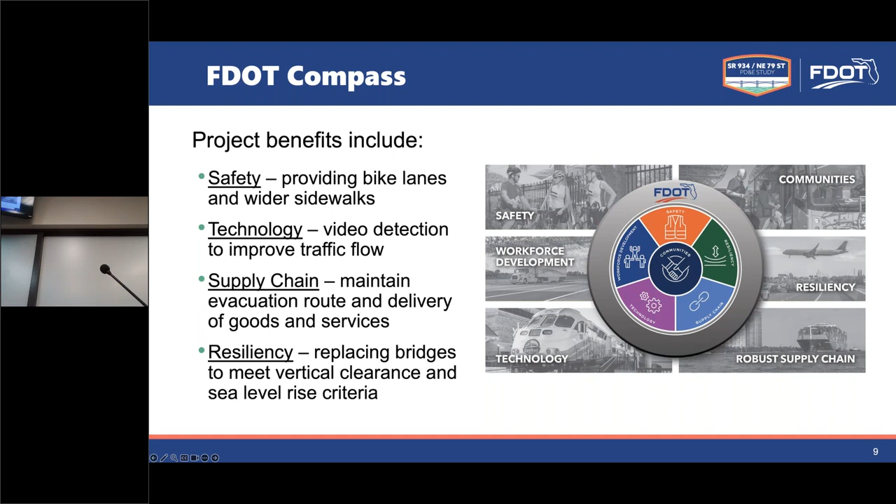The environmental review, consultation, and other actions required by applicable federal environmental laws for this project are being or have been carried out by FDOT pursuant to 23 U.S.C. 327 and a memorandum of understanding dated May 26, 2022, executed by the Federal Highway Administration and FDOT.

Project documents are available for viewing at the North Bay Village City Hall, 1666 John F. Kennedy Causeway, first floor, North Bay Village, Florida, 33141. Hours are 8 a.m. till 5 p.m. Monday through Friday. Project documents are also available at the FDOT District 6 office, 1000 Northwest 111th Avenue, Miami, Florida, 33172. Hours are from 8 a.m. till 5 p.m. Monday through Friday. In addition, the project documents can be viewed on the project webpage.

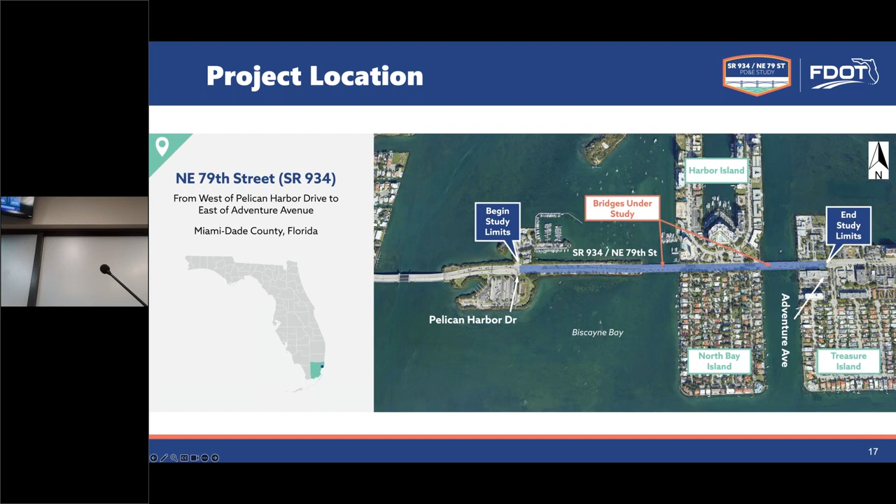FDOT is conducting a Project Development and Environment, or PD&E, study on 4 bridges, or 2 pairs of bridges, along State Road 934, Northeast 79th Street. The project study limits extend from west of Pelican Harbor Drive to east of Adventure Avenue, for a total distance of 0.87 miles. These bridges connect 3 islands within the city of Miami and North Bay Village in Miami-Dade County.

The existing bridges are concrete slab bridges, constructed in the early 1970s. The bridges are not deemed navigable by the United States Coast Guard. There have been several rehabilitation efforts performed on the bridges. The latest bridge rehabilitation in 2015 included the installation of a traffic railing on the outside lanes for bicycles and pedestrians on the Eastern Bridge.

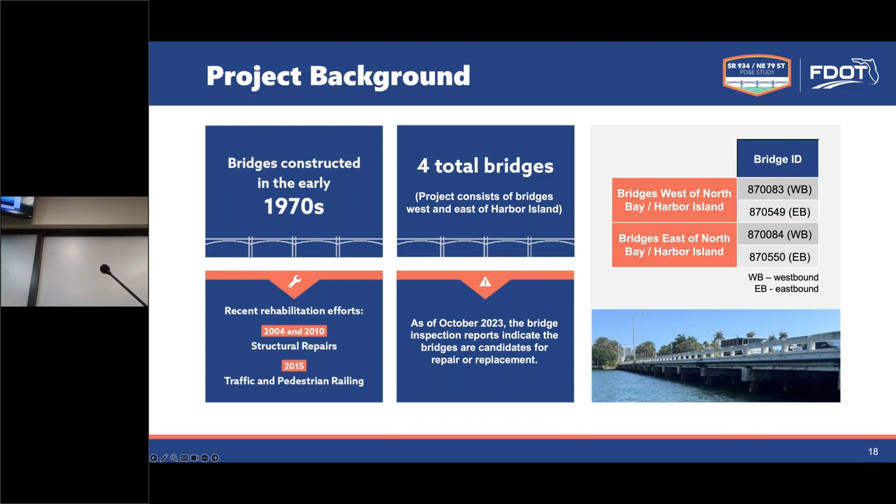Based on the most recent bridge inspections performed in October 2023, the bridges were found to be deficient and have a sufficiency rating below 50, which means the bridges may qualify for bridge replacement funds. The bridges west of Harbor Island include 2 separate structures that carry eastbound and westbound traffic.

The typical section consists of 6 lanes divided by a 15.5-foot wide raised median with 2 11-foot wide inside travel lanes and 1 13.5-foot wide outside travel lane that shares its use with bicycle traffic. Curb and gutter are adjacent to the outside travel lanes, along with a 5-foot wide sidewalk.

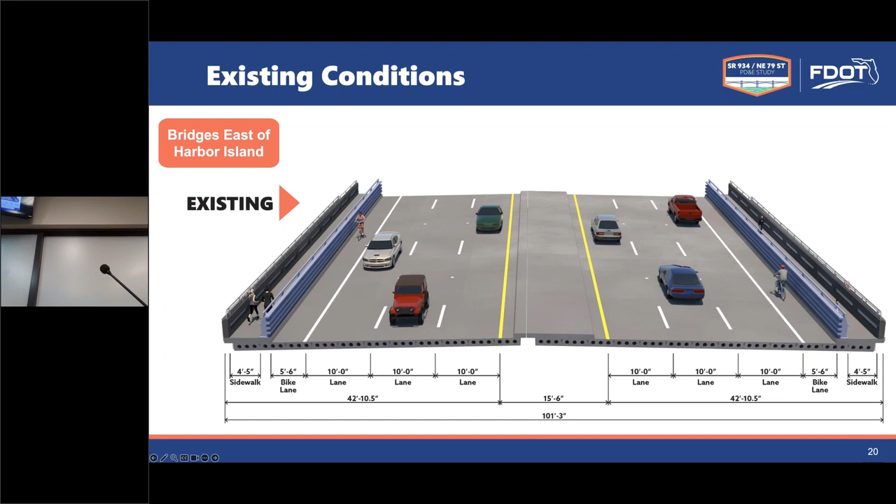The bridges east of Harbor Island are also two separate structures that carry eastbound and westbound traffic. The typical section consists of 6 lanes divided by a 15.5-foot wide raised median with 10-foot wide travel lanes, a designated 5.5-foot wide bike lane with curb and gutter, and a 4-foot, 5-inch wide sidewalk with a pedestrian railing.

The PD&E study is part of the transportation project delivery process. The PD&E process is followed by FDOT to identify engineering alternatives, evaluate environmental impacts, and comply with the National Environmental Policy Act, or NEPA, in addition to other federal and state environmental laws.

At the end of the PD&E study, and following approval from the FDOT Office of Environmental Management, a preferred alternative will continue into the design phase, followed by right-of-way acquisition and construction.

At this time, final design is funded for 2025. Right-of-way is currently not fully funded, and construction is funded for 2029.

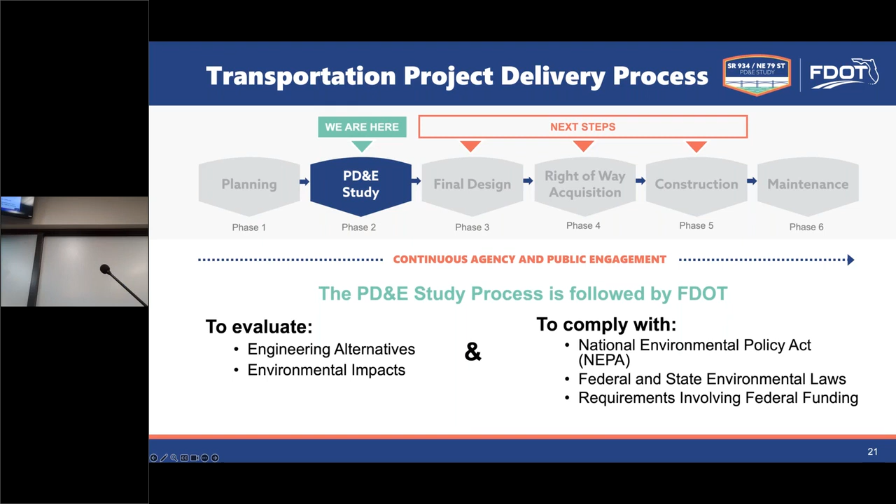The PD&E process utilized a continuous community outreach process to ensure that all interested parties have meaningful participation in the process. Public input and information received at the hearing will be taken into consideration when preparing the final documents for this study. The purpose of the PD&E study is to identify bridge replacement alternatives and to evaluate the potential impacts.

The project is needed to address the structural deficiencies of the 4 existing bridges, or 2 bridge pairs, and to maintain the emergency evacuation route and response times.

The existing bridges are more than 50 years old in a highly aggressive environment and are showing signs of deterioration. The department will continue to perform timely repairs to keep the bridges in good condition until they are eventually replaced.

Planning consistency means the project information is consistent with the FDOT and the Miami-Dade Transportation Planning Organization planning documents and programs. The project is identified in the approved Miami-Dade TPO Transportation Improvement Program. Efforts are ongoing to include all future project phases in the TPO Long Range Transportation Plan.

A tiered approach was used to identify and evaluate alternatives. Following initial data collection, the next step was to perform a typical section analysis, considering the number of lanes, lane widths, shoulder widths, and pedestrian and bicycle accommodations. Bridge height and constructability were also considered in the typical section analysis.

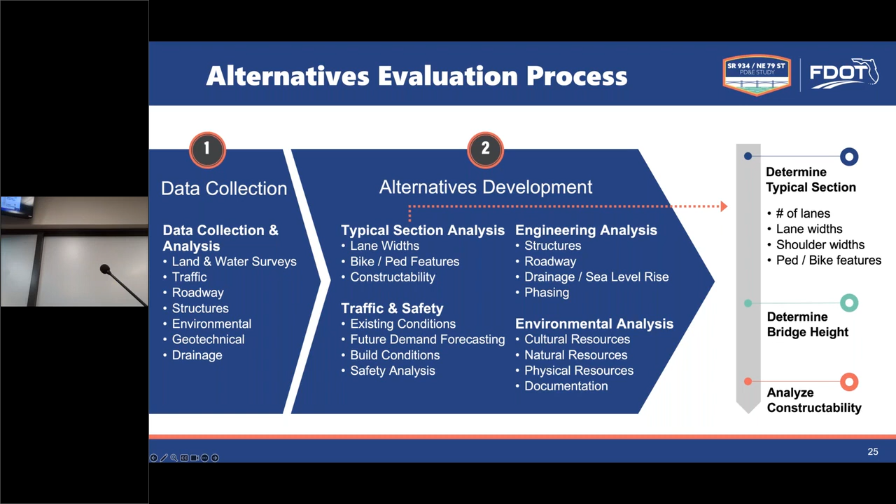Alternatives were then developed and evaluated against multiple traffic, safety, engineering, and environmental criteria. An initial alternative screening then took place, and multiple alternatives were dismissed from consideration, including the Transportation System Management and Operations Alternative and Rehabilitation Alternatives 1A and 1B. These alternatives were dismissed because they do not meet the project purpose and need.

The eliminated alternatives, in addition to the no-build and build replacement alternatives, were presented at an alternatives public meeting held in October 2023. Build replacement alternatives, referred to as Alternative 2A and 2B, were further refined following the meeting based on input and results of the impact analysis.

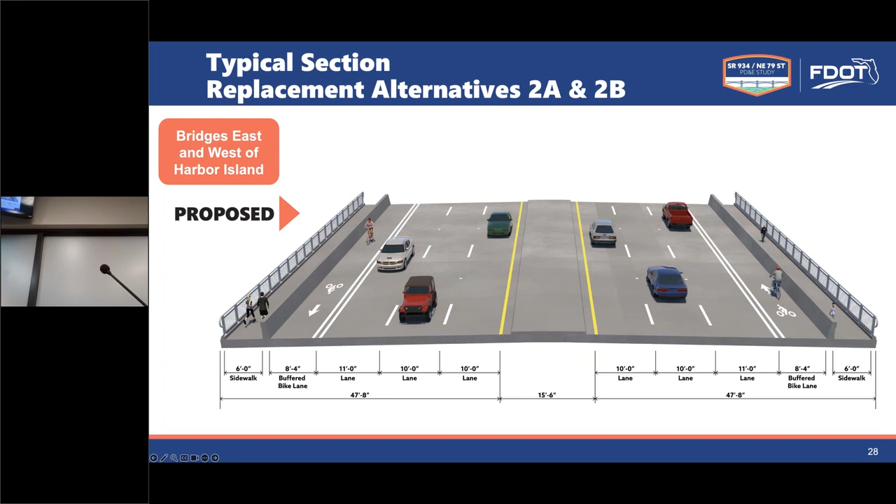Alternative 2A and Alternative 2B share the same recommended typical section and same structure type. The typical section consists of 2 10-foot travel lanes, 1 11-foot travel lane, an 8-foot 4-inch bike lane, and a 6-foot sidewalk in each direction. There is also a concrete traffic barrier between the bike lane and the sidewalk.

The primary difference between Alternatives 2A and 2B is the vertical bridge profile. Alternative 2A has a vertical profile that is similar to the existing bridges, which is an approximately 3-foot vertical clearance above mean high water of Biscayne Bay.

Alternative 2B has a vertical profile that is raised to a minimum of approximately 7 feet to meet sea level rise criteria and to increase the vertical clearance over mean high water for Biscayne Bay. Due to the increased profile, Alternative 2B would require retaining walls and the reconstruction of several driveways adjacent to the replacement bridges.

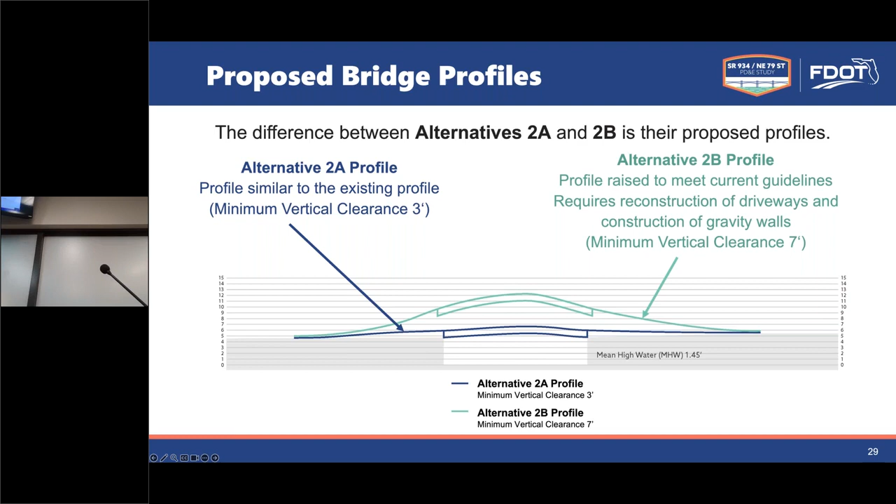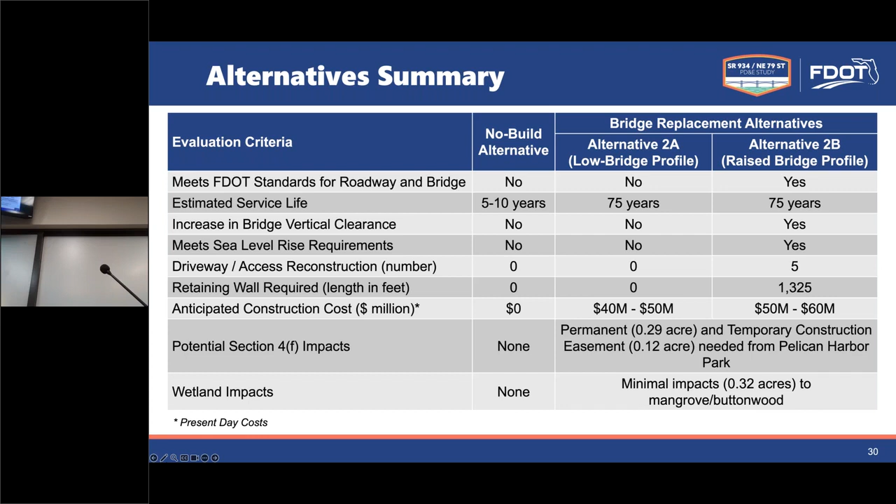Anticipated impacts from the no-build and bridge replacement alternatives were compared and evaluated. Major differences relate to how the alternatives meet roadway and bridge criteria, their estimated service life, whether they meet sea level rise requirements, costs, and potential environmental impacts.

As stated previously, there have been various opportunities for the public to provide input on the project alternatives, including the Alternatives Public Meeting held on October 2nd and 5th of 2023. Based on the input received from the meetings, as well as the analysis completed during the PD&E study, a preferred alternative has been determined and is being presented tonight.

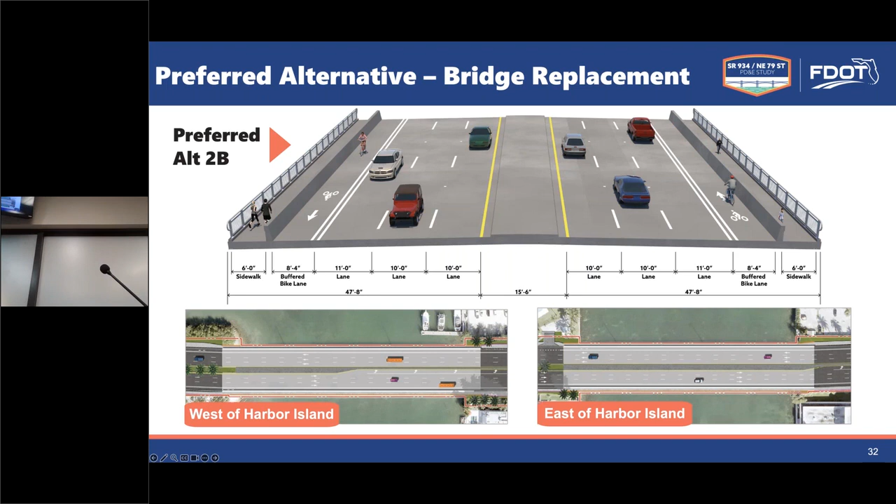Public input and information received at tonight's hearing will be taken into consideration when preparing the final documents for this study. With consideration of public input and an evaluation of environmental and engineering considerations, the preferred alternative for the bridge replacement is Alternative 2B. Alternative 2B meets the project purpose and need and fully complies with current design standards to maximize the life of the new bridges.

Following the October 2023 Alternatives Public Meetings, several typical section options were evaluated for the roadway segment from Pelican Harbor Drive to the Western Bridge Pair to provide continuity of the bicycle lanes, upgrade the pedestrian facilities, and address roadside safety while minimizing right-of-way and environmental impacts.

Based on the typical section evaluation, the preferred roadway typical section in this section provides a 15.5-foot raised median, 2 10-foot wide inside lanes, and 1 11-foot wide outside lane, 4.25-foot bicycle lanes, 6-foot wide sidewalks, curb and gutter, and guardrail at the face of the curb.

The replacement bridges would transition to the existing roadway on either side of the bridges, and the roadway would be improved to meet current design standards.

The roadway segment at North Bay Village, Harbor Island would be improved to provide a raised median, 2 10-foot inside lanes and 1 11-foot outside lane, 7-foot buffered bicycle lanes, and 6-foot sidewalks in each direction.

The proposed roadway segment at Treasure Island transitions from the preferred roadway typical section as the bridge approaches to the existing typical section at the east project limit.

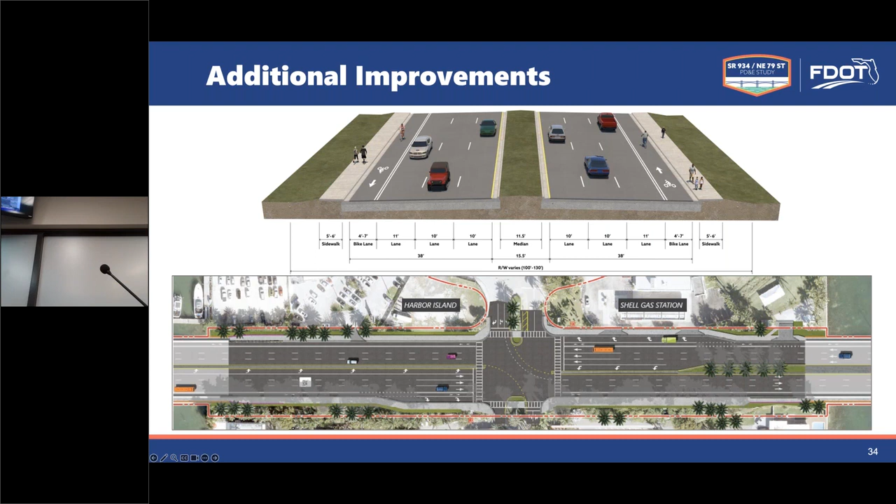2 recreational resources adjacent to the project, Pelican Harbor Park and Marina and North Bay Village Dog Park, are potentially protected by Section 4(f) of the U.S. Department of Transportation Act of 1966.

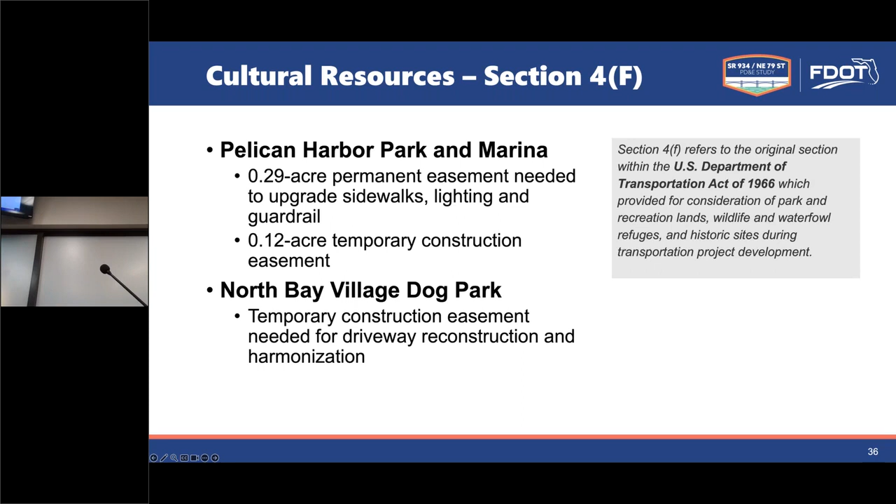Approximately 0.29 acres from Pelican Harbor Park would be needed for a permanent easement to accommodate the improved bike and pedestrian facilities, and an additional 0.12 acres would be needed for a temporary construction easement. A temporary construction easement would also be needed for driveway reconstruction near the North Bay Village Dog Park. However, the impact would be so minimal as to not constitute a use within the meaning of Section 4(f). Overall, the proposed project improvements will not impact the activities, features, and attributes of either recreational resource.

The project has been evaluated with respect to the Presidential Executive Order 11990 entitled Protection of Wetlands and Executive Order 11988 entitled Floodplain Management and Protection. No direct impact to corals is anticipated.

Some mangroves and buttonwoods growing in portions of Pelican Harbor Park are within the project footprint and would be impacted during construction. The temporary construction easement would result in 0.05 acre of impact to buttonwoods and mangroves and 0.05 acre of impacts to Biscayne Bay. Long-term impacts under the preferred alternative include an additional 0.3 acre of shading of Biscayne Bay and 0.27 acre of impacts to buttonwoods and mangroves.

Minimizing impacts to mangroves and buttonwoods will continue to be coordinated with Miami-Dade County, the South Florida Water Management District, and the National Marine Fisheries Service throughout the design and construction phases.

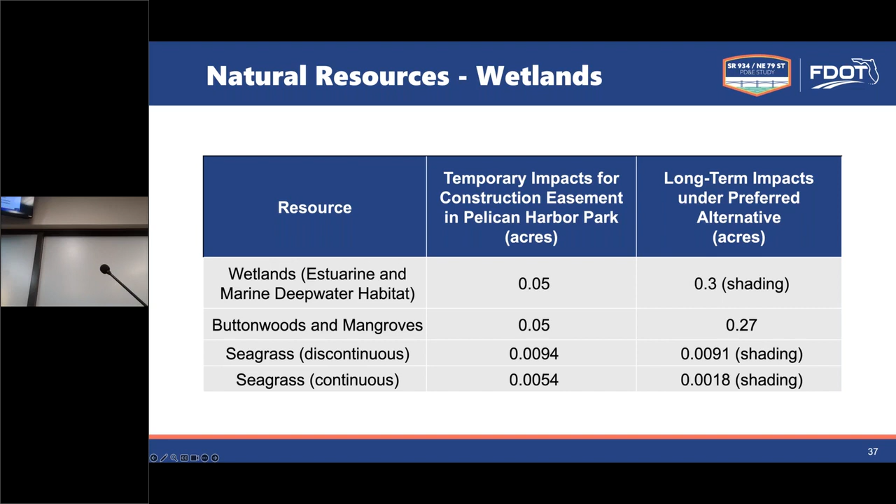The project was evaluated for potential impacts to federal and state threatened, endangered, and protected species. 23 listed species and 2 candidate species were identified as having the potential to occur in the study area. The project may affect, but is not likely to adversely affect, several species. To avoid impacts to these species, FDOT has committed to various protection measures and best management practices during construction.

The preferred alternative may require relocation of utilities currently located within the right-of-way or mounted on the replacement bridges. The extent of utility impacts and cost of utility relocations will be determined as part of the design phase.

Potentially contaminated sites were identified and evaluated. Of the sites identified, the project has the potential to impact 4 sites with a high risk for contamination and 1 site with a medium risk. These locations will be further assessed during the design phase prior to construction.

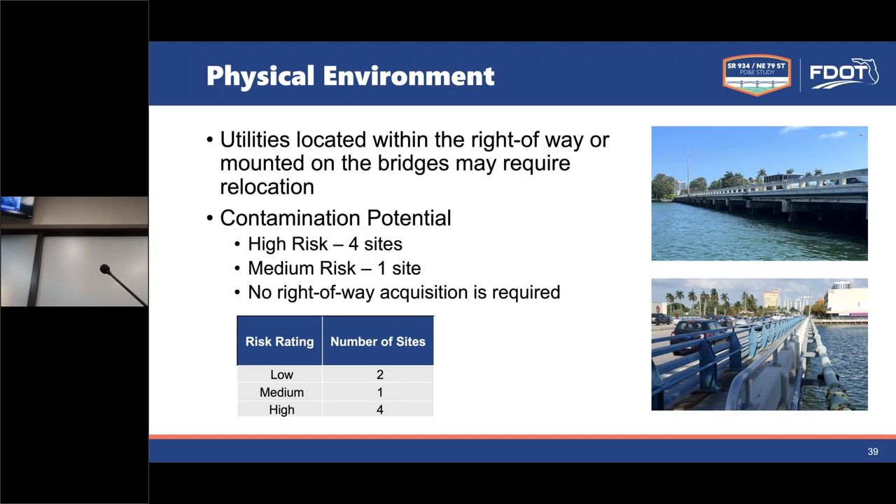This project will not cause any relocation of families or businesses. All right-of-way acquisition will be conducted in accordance with Florida Statute 339.09 and 421.55, and also the Federal Uniform Relocation Assistance and Real Property Acquisition Policies Act of 1970, commonly known as the Uniform Act. The right-of-way specialists who are supervising this program are here tonight and will be happy to answer your questions.

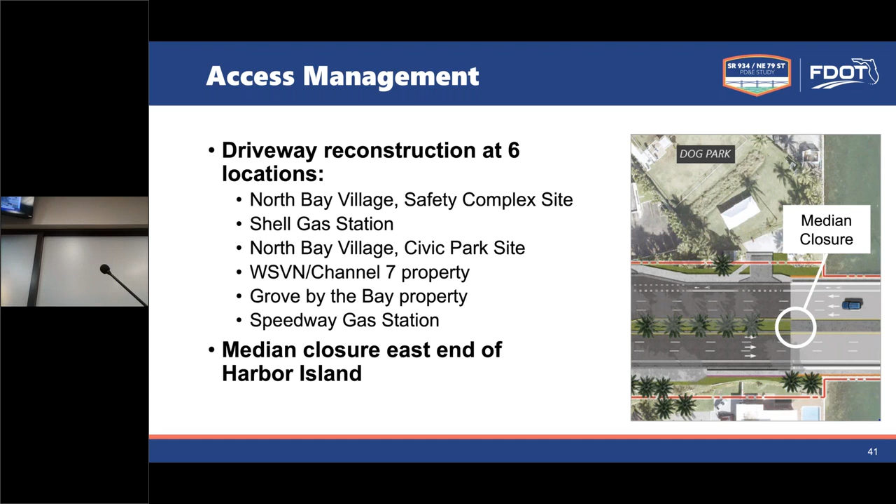Access management is used to determine the locations of driveway connections, median openings, and traffic signals to improve safety and traffic flow. The existing access management controls along 79th Street will remain, including the signalized intersections and driveway connections. Due to the profile of the preferred alternative, driveway reconstruction will occur at 6 locations along the corridor. In addition, the median opening on the east end of Harbor Island is proposed for closure to prohibit U-turns and improve safety at this location.

This PD&E study started in May of 2022 and is anticipated to be complete by fall 2024. Following this evening's hearing, FDOT will gather public comments and finalize the PD&E study documentation for approval. After completion of the PD&E phase, the preferred alternative will move into the design phase, which is currently funded for 2025. Followed by design, the project will then move into construction, which is funded and anticipated to begin in 2029.

The next step is to incorporate your input on this public hearing into our decision-making process. After the comment period closes and your input has been considered, a decision will be made and the final PD&E document will be approved. This project has and will continue to comply with all applicable state and federal rules and regulations.

We encourage your input and feedback about this project, and there are multiple ways for you to participate. All public comments and questions are part of the public hearing record, and every method for providing public comments and questions carries equal weight. While comments and questions will be accepted at any time, those submitted by May 23, 2024 will become part of the project's public hearing record. All questions will be responded to in writing following the hearing. This concludes the presentation.